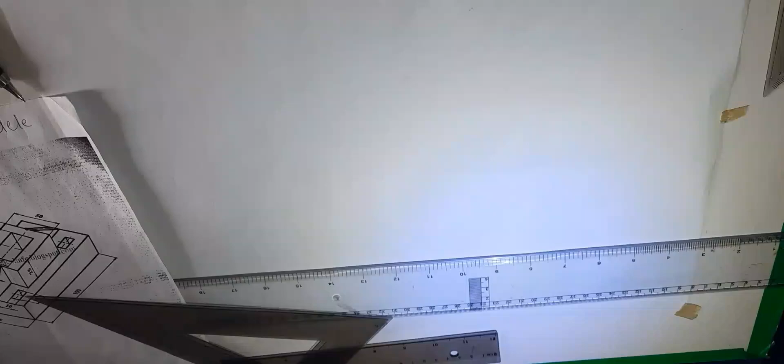Right here, we are going to be making an isometric block. We are going to be doing technical drawing today, and we are going to be replicating this very isometric block on my plain paper. So I'd like you to stay tuned. We will be giving a detailed explanation concerning it. So let's begin immediately with no further delay.

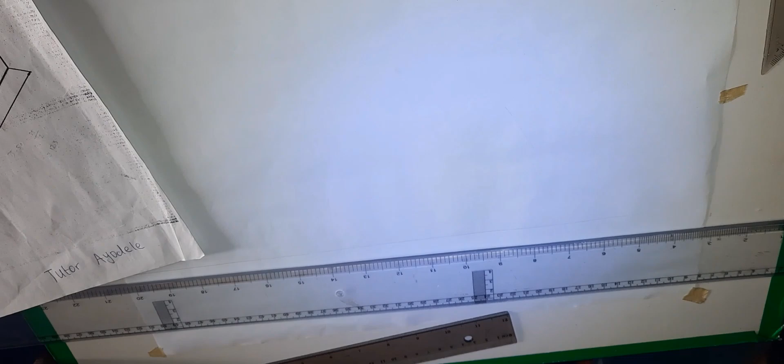Let's begin. We are working with our T-square and our board, so use your T-square, draw a very straight line, let it be faint. I believe you can see the line. Then this is your 30 by 60 degrees set square, and your isometric block is in projections of 30 degrees to the horizontal line that has been drawn. Okay, so this part is the 30 degrees part. Why? If here is the 60 degrees part, if I turn it here, a full triangle is 30, this 60, this 30, and here is 90 degrees.

So let's start. Get a point on the line that you've drawn. Then from that point, project lines to both directions. Take note of that point.

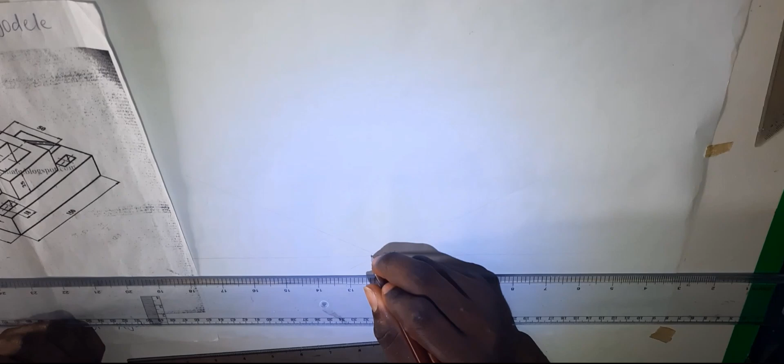Now, like I said, this is your 30 degrees. This here also is 30 degrees. So most of the lines you're using, let them be faint at first, because you're going to use thick lines to show them. So looking at this part, we are going to take here up. I want to start with that place first. So draw a straight line upwards.

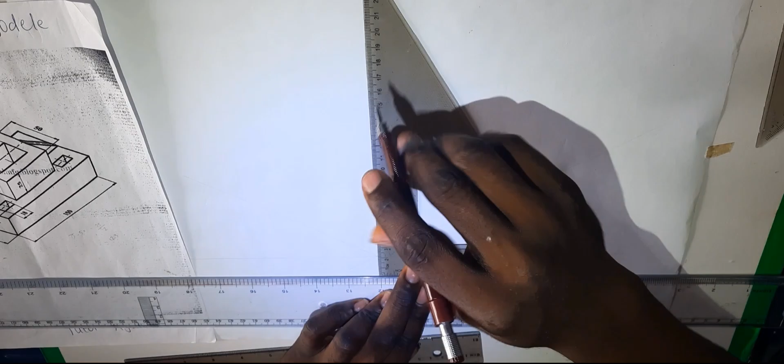Mark 25. So here is the 25 millimeters. This side is equivalent to this side. So I'm measuring 25 millimeters. I'll take my meter rule and get 25 millimeters upward from point 0 to 2.5. This is 25 millimeters, equivalent to 2.5 centimeters. So let's take note of that.

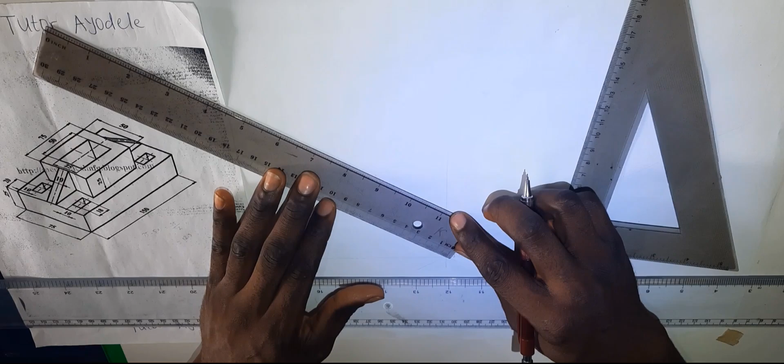So I've done that. Then here is 75 millimeters, which is 7.5 centimeters. I will take the point also. 7.5, equivalent to 75. Take the point. This is the point here. Now I'll take this same line that you've drawn here and transfer it here also upward. You're making reference with your T-square. Take note of that.

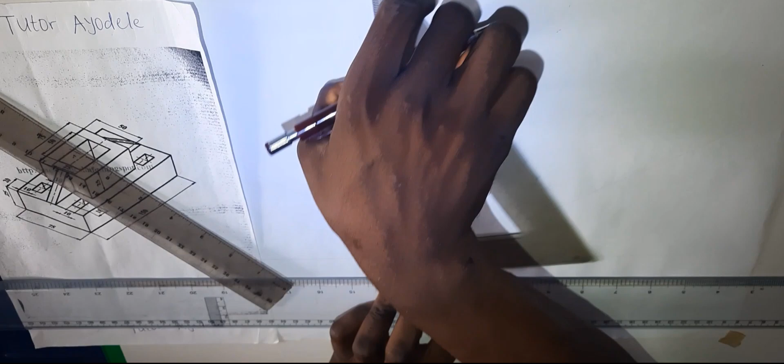Now I can use the measurement on my set square also, because it seems clearer. From 1, I'm going to count 2.5. 2.5 will be at 3.5 for me, because I'm starting from 1. But if I start from 0, it will be at 2.5. So this is 2.5. This is 2.5. What I'll simply do is to connect them directly instead of projecting lines again. So you can see I'm through with this very part.

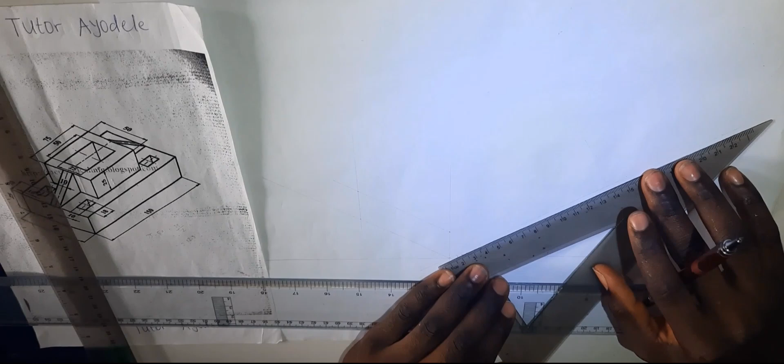I want to focus on this other part now. So this time around I'm taking the 150 measurement on this side. 150 millimeters. Take note, all dimensions are in millimeters. But because I'm using the ruler and the set square, it's centimeters, so just divide by 10. Millimeters divided by 10 will give you centimeters. 150 on my set square. I'm using from 1, so I'll use 160 here. So I've marked the point 160.

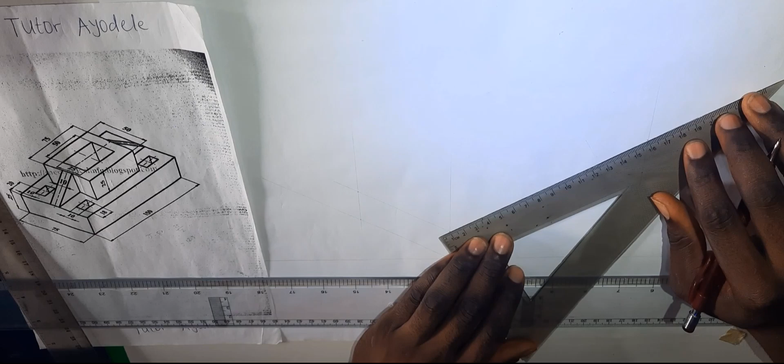Okay. Project line. Using my set square, project a straight line up from that point. So here is the same length as here, and it's 25 millimeters. So I'll still take 2.5 upward. I can use from anywhere. If I'm using from 6, it's going to be at 8.5, because 6 plus 2.5 is 8.5. So we'll simply just connect them. You can see that my measurement is accurate. Let me show you from 1 to 160. Can you see that is 150 millimeters? Very accurate. So I'm through with this part.

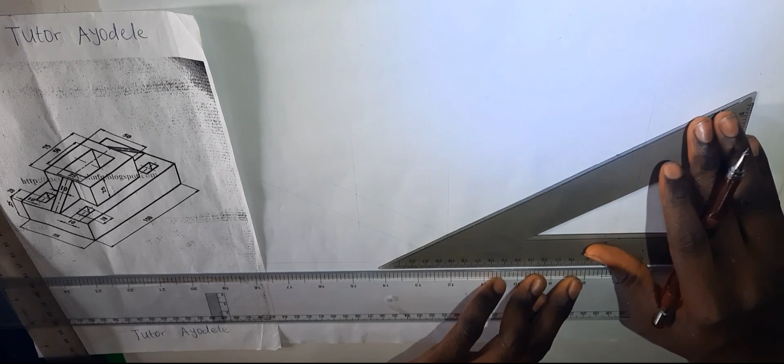Now I want to focus on the top. The top is going to be a bit complex, but I bet you if you are with us, it's not going to be complex at all. So this line that you have here, transfer it using your set square to the other part. Let it rest on your T-square, and then transfer the line upward from that point. And then you measure 150, which I'm using 160.

No, this is the other one. Yes, this is 160. Yes, I've done that. Then if you check here also it will be 7.5, and it's accurate. So draw a line.

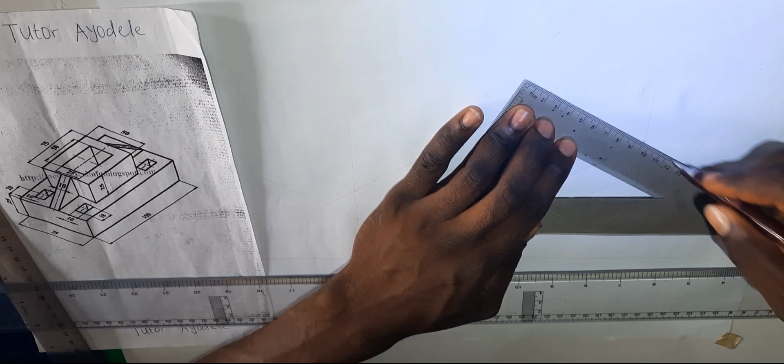So I'm through to the top, but I want to draw all those things that are at the top. It's just like a house built upon a house. So this is a building on top of a building. That's the essence, the knowledge of isometric block. So from here we have it that half of this, because this is 75, so half of it will be what? 75 divided by 2 gives us 37.5.

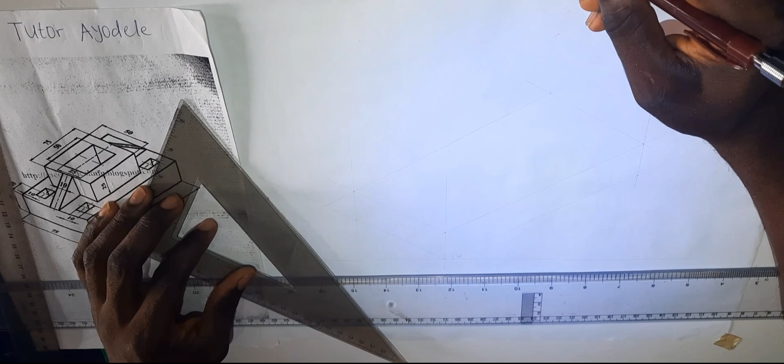Yes. You're 37.5. Alright, so half of this will be 37.5, half here will be 37.5 also. So 37 is 3.7, which is 4.7 for me, but I'm using from 1. 4.7.5, the 5 is in the middle, so this is my 37.5.

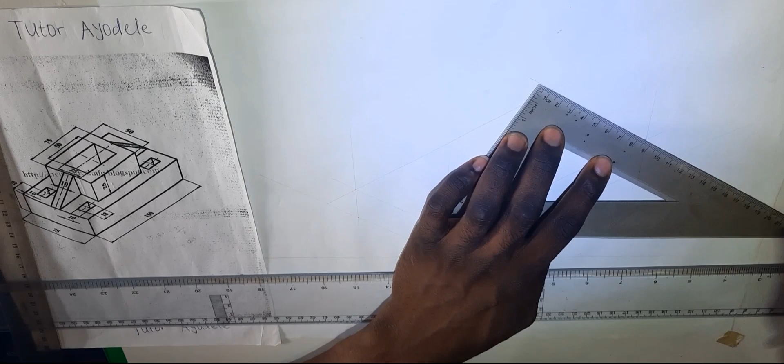Please take note, like I said, we're working with millimeters here, and here is centimeter. Simply divide whatever you have here by 10 and then use it on the meter rule. That's what you are working with. So 37.5, like I said, is 3.7. Then in the middle line also, the one will be 4.7. Then in the middle of 7 and 8, you put your point.

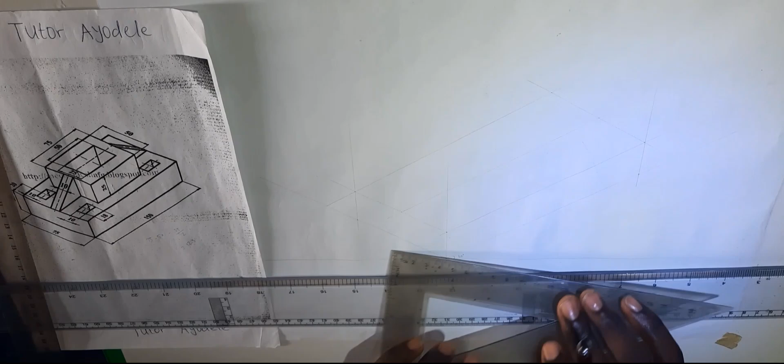That's 37.5. Alright, you can also mark them together, you can join them together, faint lines. All your work should be in faint lines first. Faint lines first. Alright, so I want to construct this very thing that is up here. This very thing, I want to construct it.

Now the distance, I'll get the middle, because this one was done in the middle. So the middle of all this footing is what? 75. So let me get the middle here. The midpoint, 75. That would be what? 85. Because I'm starting from 1.

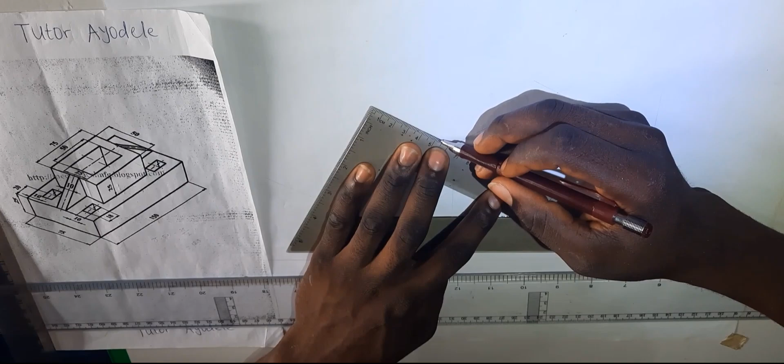The reason I'm not making use of my meter rule that much is because it is somehow faint. This 85. Okay, join them together. So this is the exact midpoint of this very shape that we're working with. So I want to construct this now. I'm going to construct this full shape.

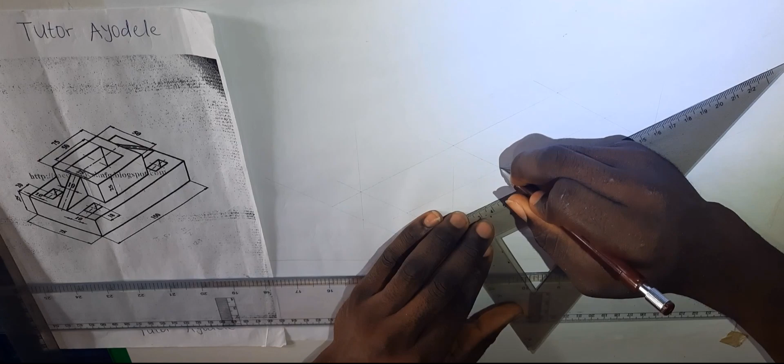Here to here is what? 50. So here to here is 50. So the base also will be what? 50. But the footing is 75. So from this middle, let's get the middle. 50 will be here, 50 will be here, then 75. Let's get 75 first. 75.

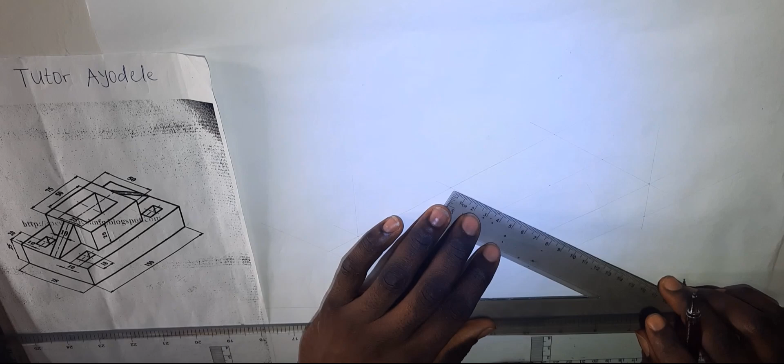It's 85 for me. Right here is 50. That's 25, 25. 25, 25, using 25, 25 here, and what? 25 here. That's good. You can also mark it here. 25 here, 25 here also. You can do the same here. That's the reason why I'm doing that.

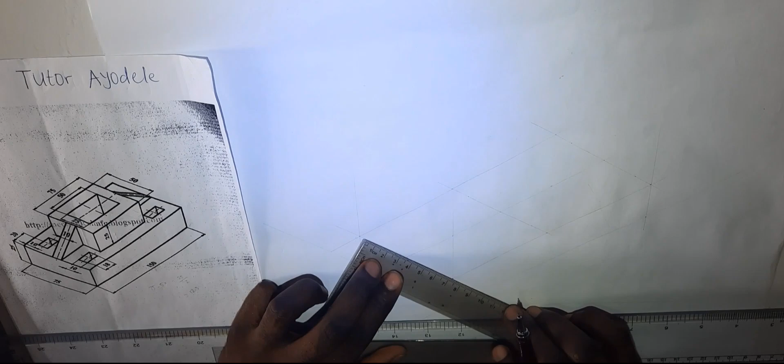All your points, all your lines should be what? Faint at first. You join the lines together. See that my lines are very accurate. Alright, I want to transfer this line. Instead of marking points again, let me just transfer this line.

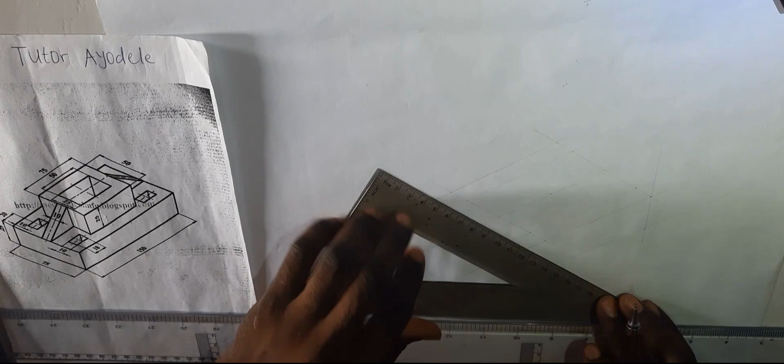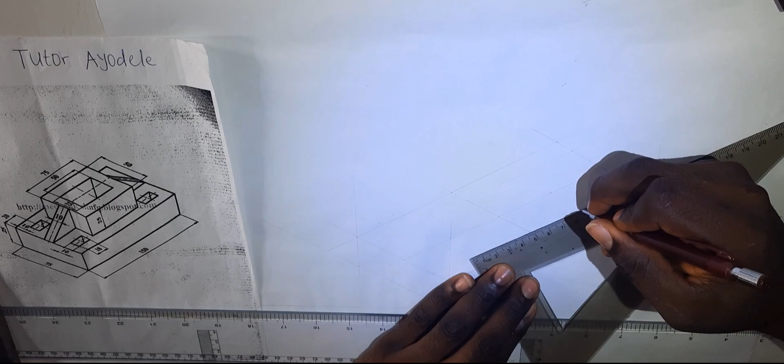Okay, for accuracy, let's mark the point. 37.5, 37.5. Also here. That's 37.5. Mark as many points as you can for accuracy, please. As many points as you can for accuracy. 7.5.

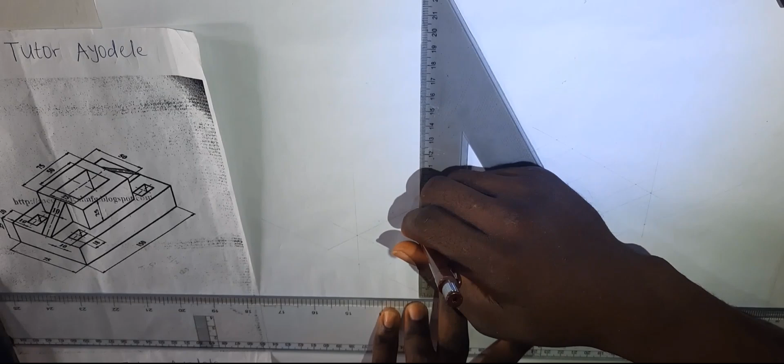Alright, so I'm done with that. I'll simply connect the lines together. So this full part is half of 75, which is 37.5 here also. So now let's go ahead to construct that shape on top. From those points you marked from here, project lines upwards. Like this. Project this upward too. Then project this upward also. Yeah, so I'm through with that.

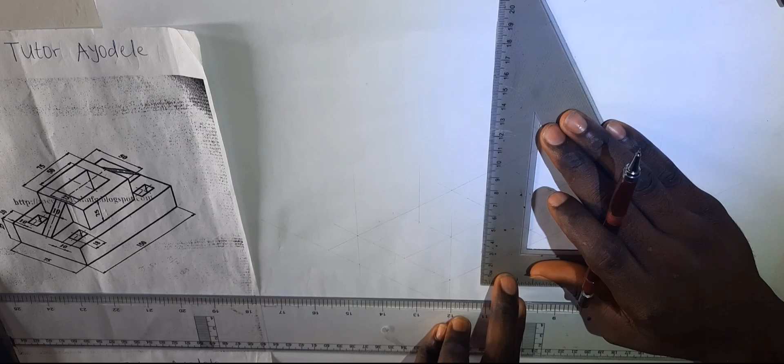Now you see the height of this upper box is 25. The height is 25. Let's mark out 25. From 3 is going to be 5.5 here. It's going to be here from 3. So here, from 4 is going to be 6.5. Do not be confused though. I believe you should know simple mathematics. So from 4 also, we're having 6.5, that to represent 2.5. Yeah, so that is it.

Now let's mark out those points. Let's join them. Join the points together. We have this. This one is already joined together.

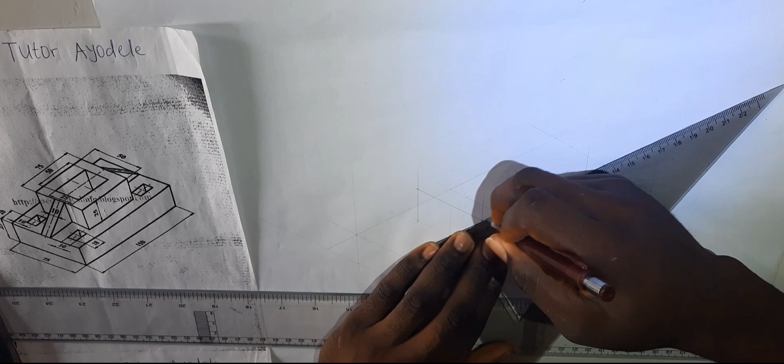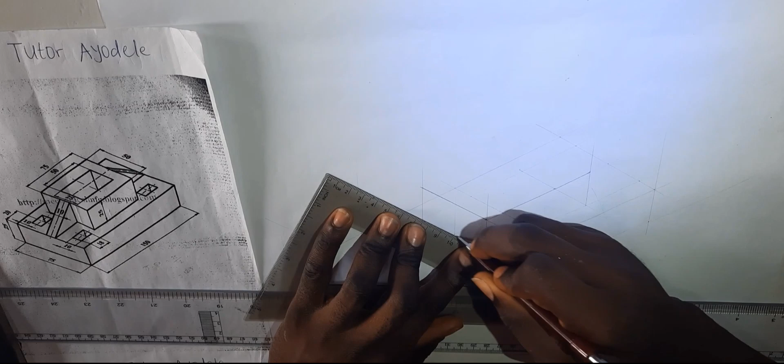Let me make it a little bit thicker so we'll not be confused. Now I can thicken that place, the upper one, so that we will not be confused. We'll know what you're doing. But the advice for not thickening our lines at first is so that you will know what you are doing, so that you will not dirty your work also. But I want to thicken it so that we'll get a clear picture of what I'm saying and not be confused because of the too many faint lines that are there in my work.

So I believe you can see the shape coming out now already. The upper box. It's like a cuboid actually, not a box. It's a cuboid, not a cube. Now as you may know, this place is there, like it's for this side. So when I reach, I'm going to clean this place to indicate this shape that is there. But for now, let's concentrate on the upper. So I've successfully drawn this.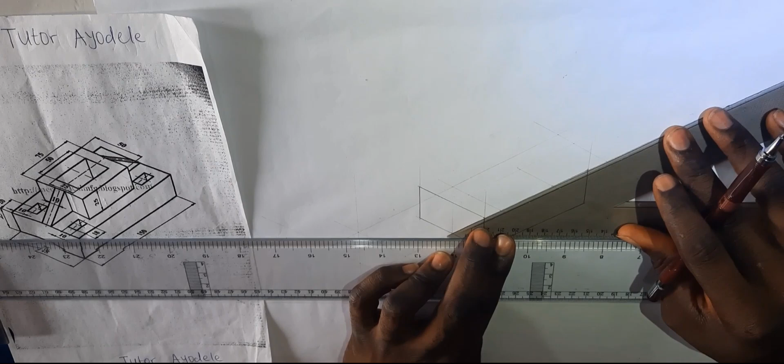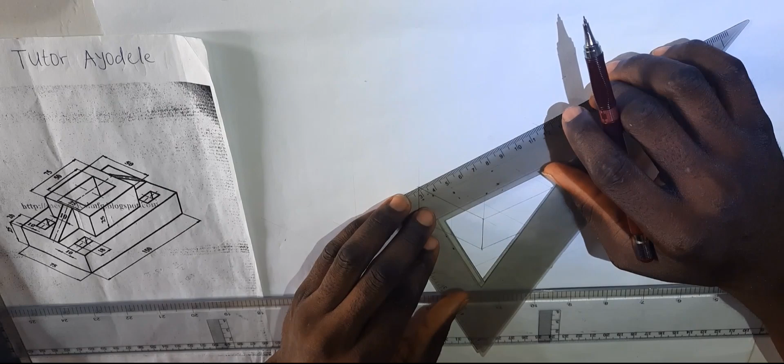I want to just transfer this line now to the other side. So if you do that, like this. All right, so I'll mark out 75 on that. 75 from 3 to 75 is going to be 10.5 centimeter. That represents 7.5. Then here also is 50, 3 to 8. You can see that they are accurate. 50. I got the 50. Let me also bold it so that you understand what I'm doing and not be confused.

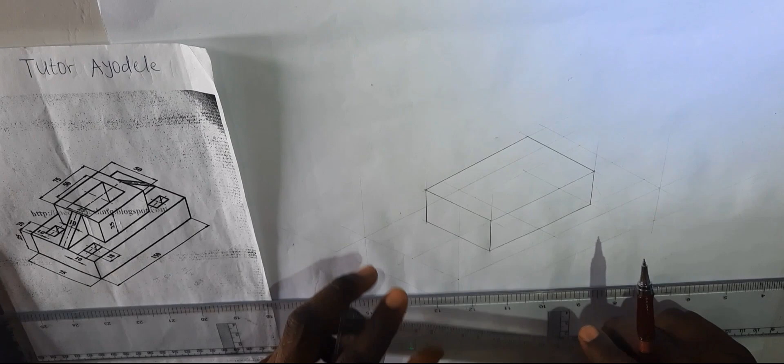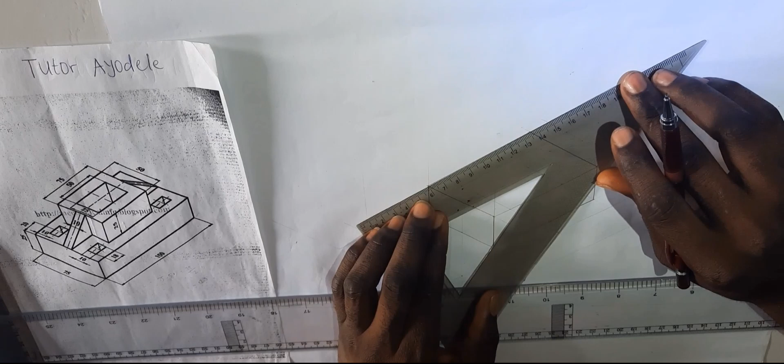All right, so I want to get the middle. Now here is 50, so let's get the midpoint. Half of 50 is what? 25. That is from 7 we have 9.5. Mark there. From 8 we have 10.5. I think we already have a middle. This is the line already, so no need to draw that line. From 6 to 13 we have to get 37.5. If you add 37.5 to 60, it will be 97.5. So mark that point there. From 60 again, you have 97.5. Mark that point there. Then just join them together. Now this is the midpoint of what you're working on.

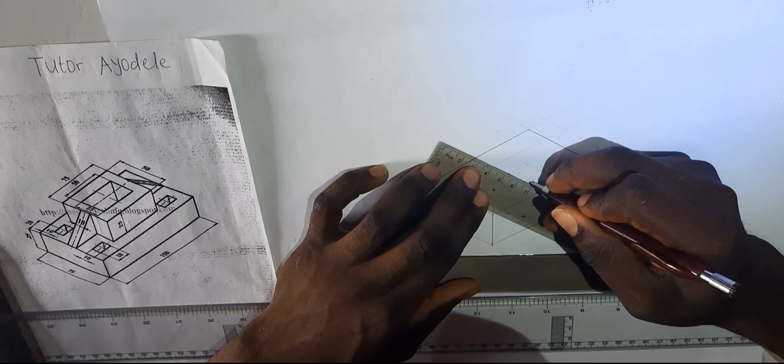Now this whole thing is 25. So 25 divided by 2 is 12.5. Let's work with it. From here is exactly 12.5, and this will give me 25. This is full 25. Now we've gotten that place accurately. The other side is 50. Let's see if this is accurate also. From here to here is 25. From here to here is 25. That is 50. To get the one here also, from here we're trying to get 25. From here is 12.5, here is 25, another 12.5 again.

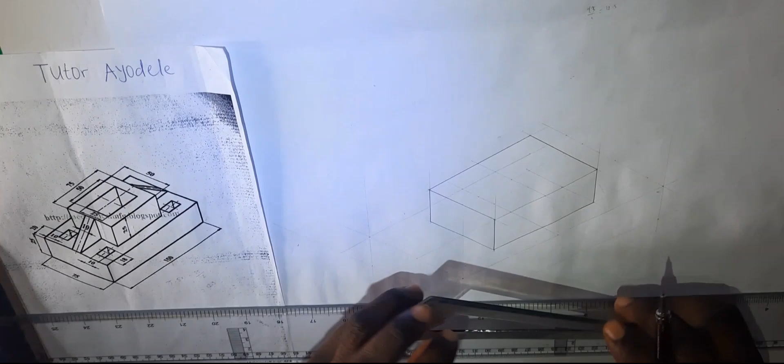All right, so we're almost through. Kindly, you see these two points, kindly join them together. Then from here you have another 50 again. So you have another 50. This is 25. This is 25, 50. And this should also be 25. Accurate.

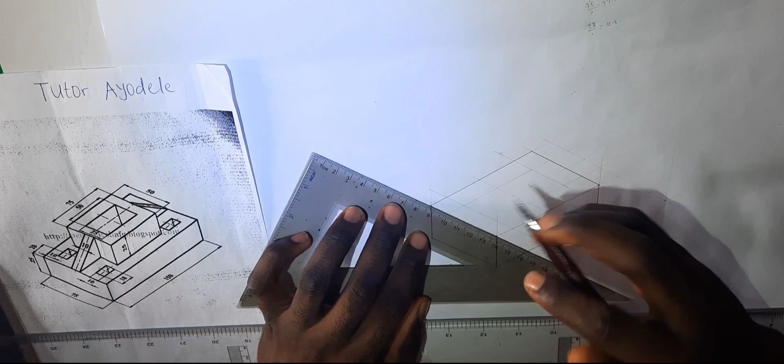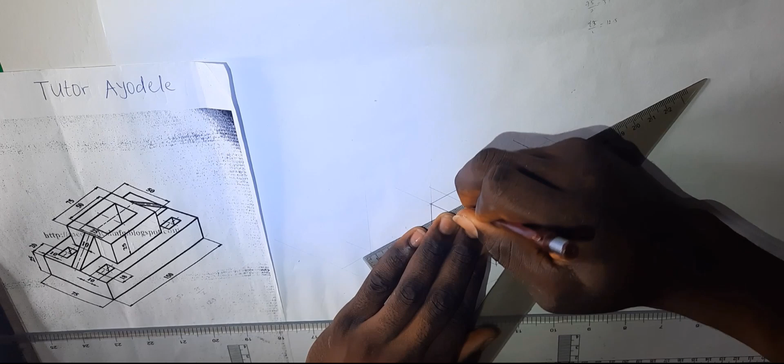All right, men and brethren, we're almost through. There's still some things to do, but I like to try as much as possible to be fast enough to your own understanding, and I believe you have been following. Now I'm going to bold it, thickening it, to see the true shape of the upper block, the cuboid at the top. All right, successfully done that.

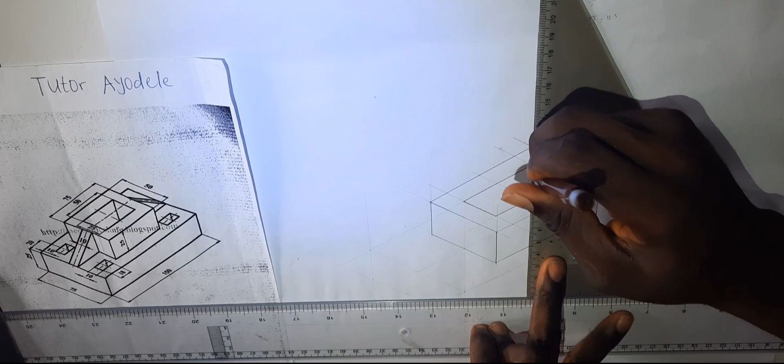Now look at this hole. In the hole there's one line going down, indicating that there's an opening there, so we are going to put that line there, just a straight line. Place your set square on your T square. This is called the set square, this is called the T square. Place it there and draw a line from the edge. Make it faint first from the edge. That is it. So we are almost through with the top.

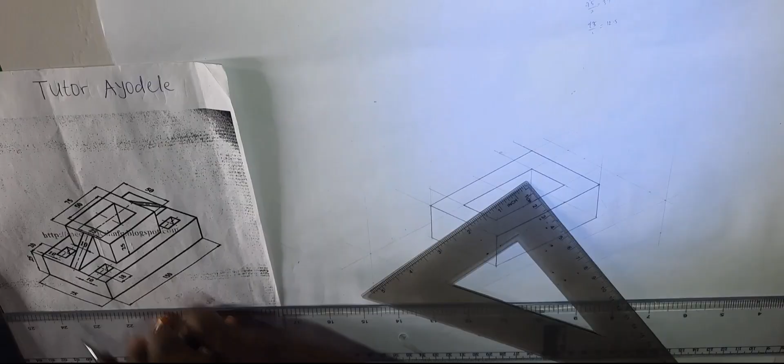Almost through with the top. So I want to try and construct this well, 1 2 3 4 5 things to construct. So let's do that. Now from here to here, the midpoint of this box to this outer line here is 20. So let's mark out 20 here. From 5 to 7, that's 2 centimeters, which is 20 millimeters. I've told you before, divide millimeters by 10, you have what? Centimeters. Okay, you should know your mathematics.

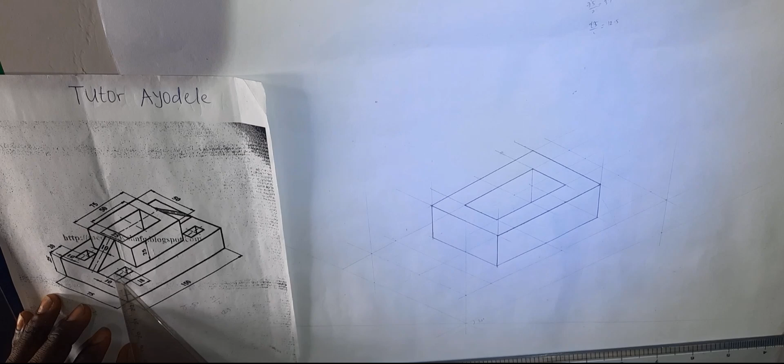All right, just simply join them together. Yes, you can just join them together. Make it faint, join them together, no problem. So you have that already. Now the distance from here, this part to the edge of the rectangle there, is what? 10. Yeah, 10. And also it's also 10. So from here to here is what? 20. It's going to be 20 also.

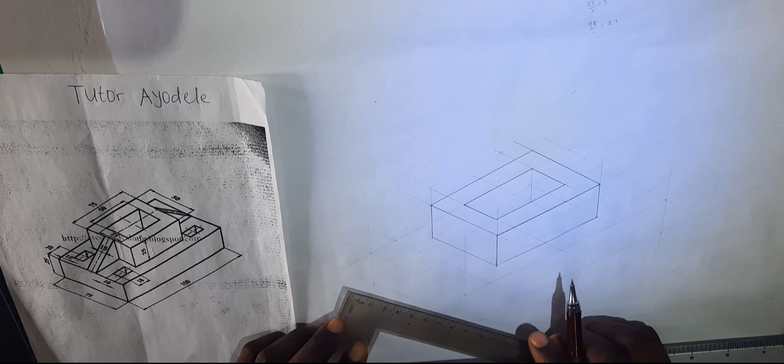So 2 to 4 is what? 20. 2 to 4 is what? 20 again. Let's mark out 10 also. Let's mark out 10. Now, simply join those 2 points together.

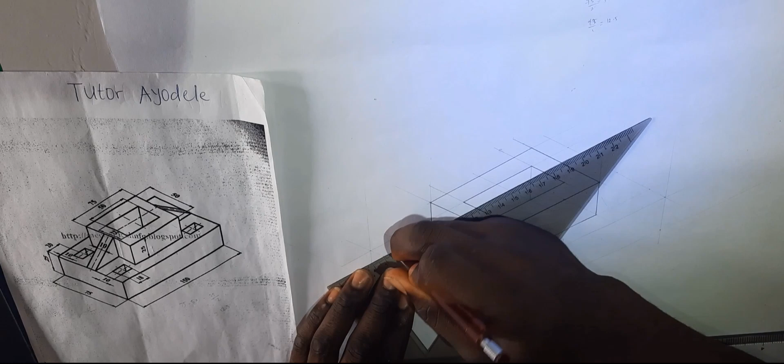Now, take note that the rectangular part of this is 18. So this is the middle of the square. So let's take 9 here and 9 here and join. We have 9 here, 9. What I'm measuring is 9 millimeters, which is 0.9 centimeters. 9 here also. The same thing for this part, 9 and 9 here. So join the points together.

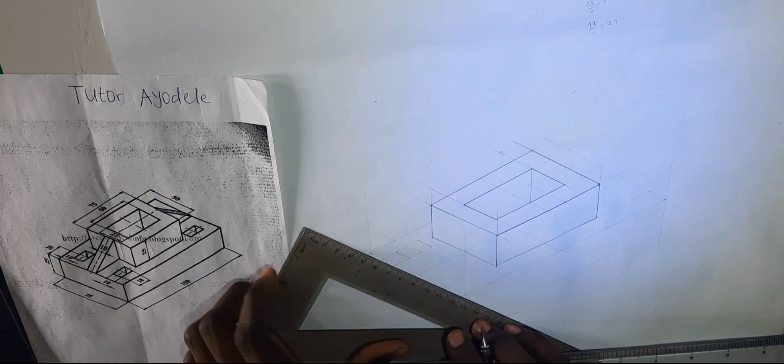Join them together. Let me shine it so that you have your shape. You have your rectangle opening there. It's like an opening. That's why you see your center line there. I'm also going to indicate that center line. But the size of this is 18 by 10. Look at it. 18 by what? 10. Here also, let's do likewise. Let's do justice to this place also.

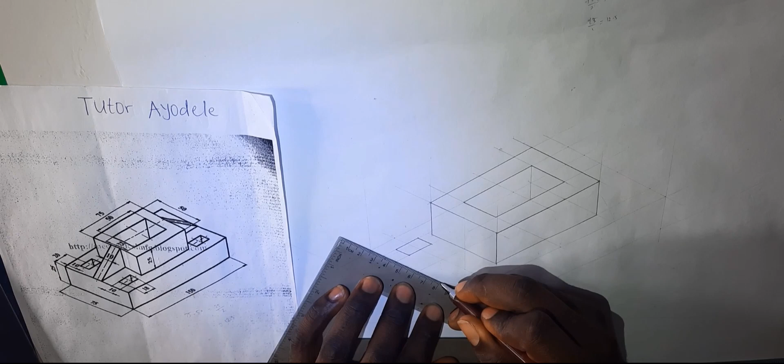That is 20. Sorry. From here, this is 20, and this is what? 10. The same thing with this place. I have here to be 20, and here is what? 10. Simply join the lines together.

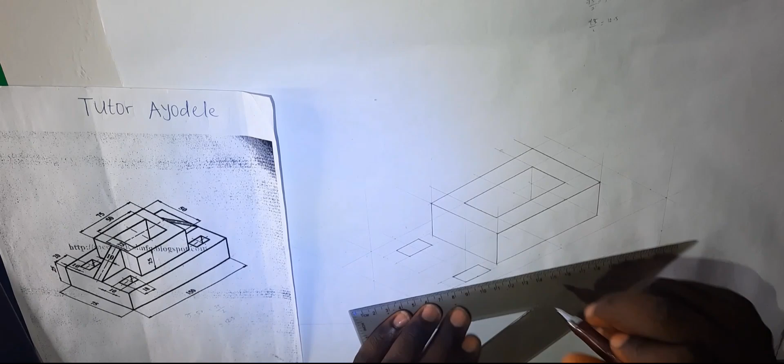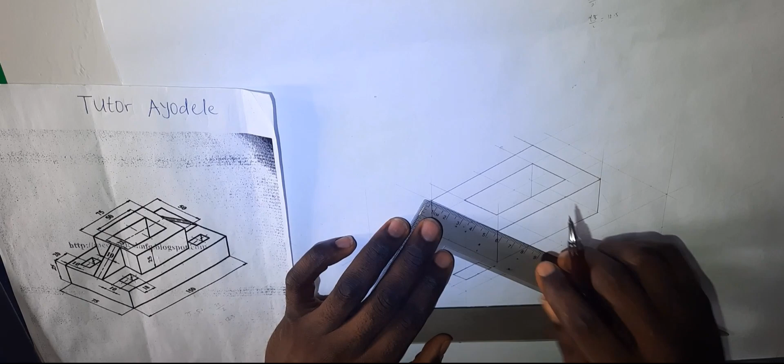All right, so let's continue. I've done that. Now I want to get this part, the midpoint. We've done the midpoint already. We've established that. Now the size of that is 10. So mark out 10 millimeters, I'm taking half here, that is 5. Okay, the same thing here, 5, 5 here also, taking it there like that. So I'm going to clean this whole part because of what I want to draw. I told you before.

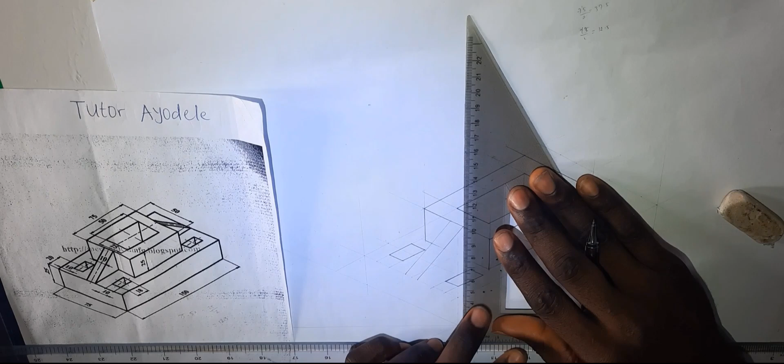All right, now connect this line to this line, and connect this also to this. As you can see, we've done that successfully. Now the next thing to do is to draw a straight line from this point. I just join it downwards from this edge here, to meet this side. Yeah, and you are through with that. You also connect from this part to this one also. All right, almost through with this work. After that, we are going to make sure we border everything.

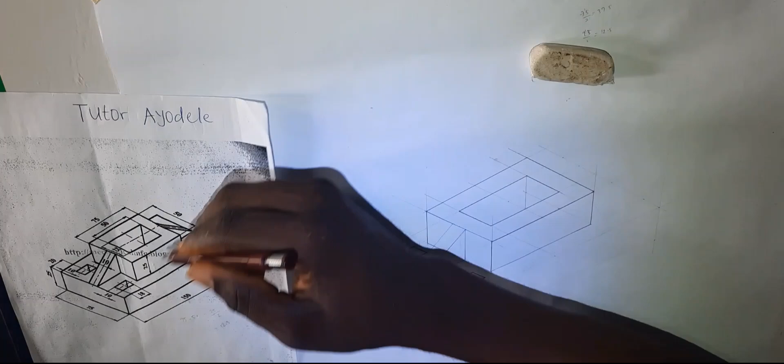Now we are doing the other part. As you can see, this part shows, this one shows, and there's also this box here. I don't know if it's going to show, but we'll try to construct it to see. I'm not sure. So let's do that. We're going to have 10 also. This is the midpoint. So we're having 5 here, 5 here also. Then the same thing goes for this place. 5, 5.

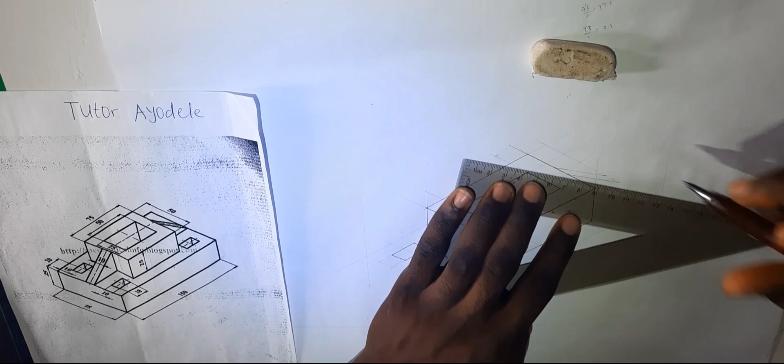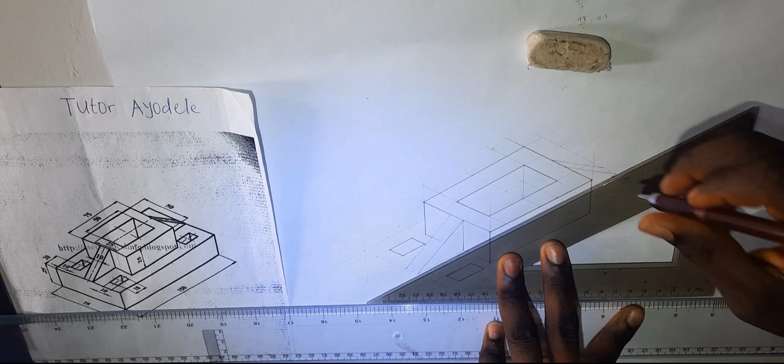Okay, connect this line with your set square, slant line, like this. Please use straight set squares, don't mind my own. Now we are going to construct this one. Remember that this distance is 10. And from here to here is 20. So mark out 20 there and join. Just join with the other one that you have.

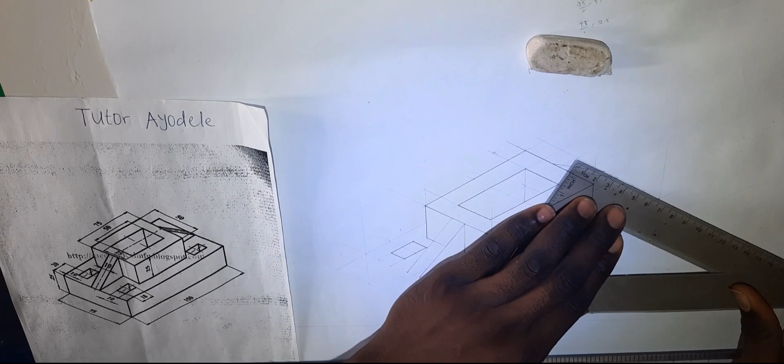All right, so now we are going to get this full thing. You have 20 there. The middle is 10. Then also remember, from here to the middle of that opening is 20.

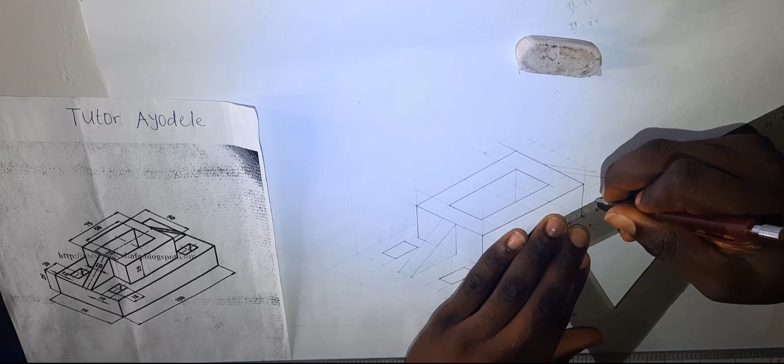Simply mark out the 20. All right. So we have it as such, right? Now the full length of this is 18. So here that we mark is 10, not here. Here is not 10, but here. So let's join them together. I used here initially to draw this place, so let's join them with here. They correspond to each other.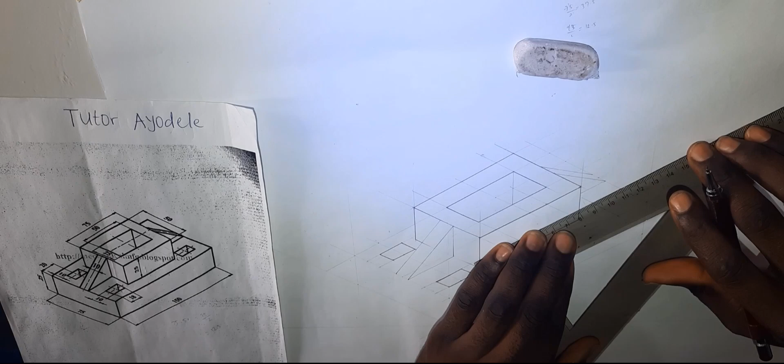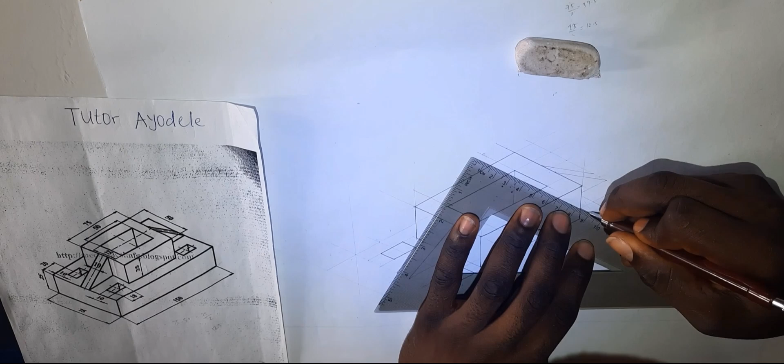All right, so this is my midpoint of this box, this opening. So take 9 here. I'll take 9 here, that is 0.9 here also. And then from here the same thing, 0.9 also. Yeah, then join. Join them together.

Okay, men and brethren, I bring good news to you. We are through with this. What I will do is to begin to shine on these things, like bolding it. Make it bold. Make it look clearer. Bring out the real work you are doing. Now, if you look at the boxes, they have lines showing you that this is an opening and that you should have a center line for it, like I did for this. So ensure you put that line in all of them. Make it faint.

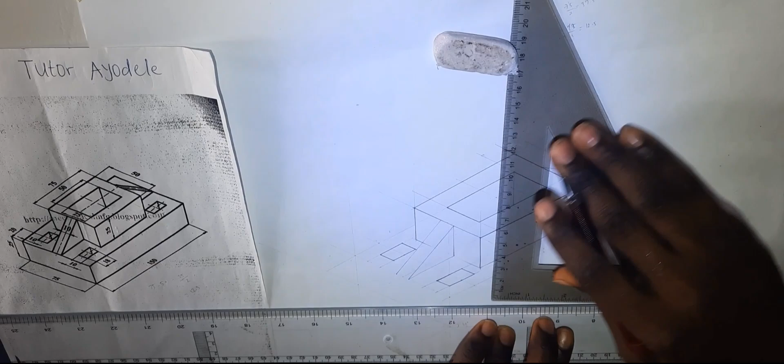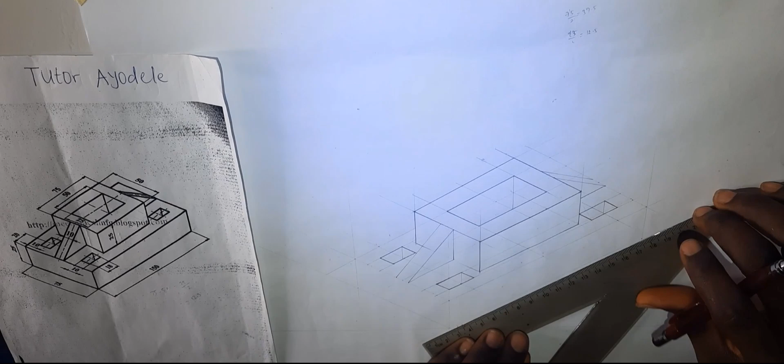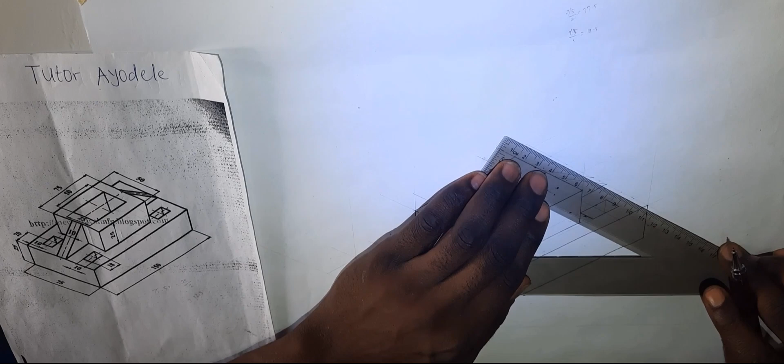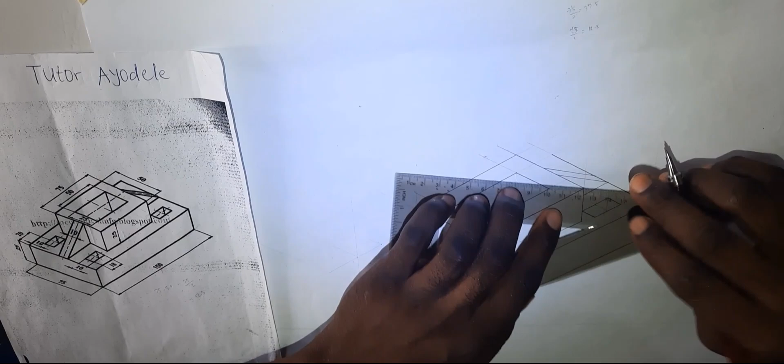Alright, so let's give our work its true nature. Let's make it sharp. Let's bolden everything. You have here, draw your line, make it bold. You can work with a handkerchief so that you can always dust your work when you're through with a particular place. Don't use it to rub your work. Just dust the paper with it, so that the pencil scrapings don't rest on the paper and cause your work to be dirty. So just make it bold. Bring out the true work you are looking for. Bring them out. Here also.

Alright, you can now see how it's giving it meaning, right? Before we bolded it, you were seeing a different kind of thing, as if, does this even make sense? But now it does, right? That's the beauty of isometric and technical drawing, actually. So bold your work, make it clearer, bring out the true shape you are looking at. It's the true shape that you're working with.

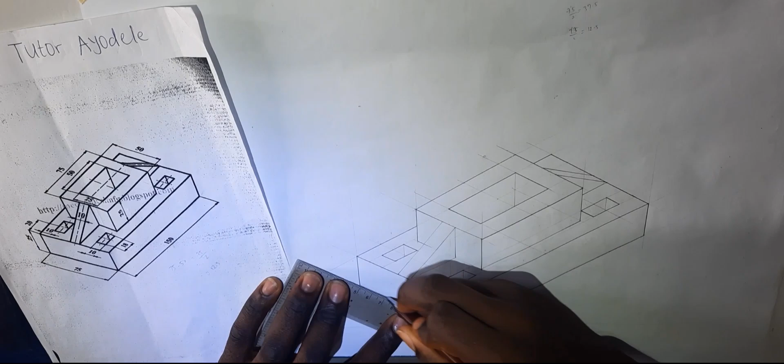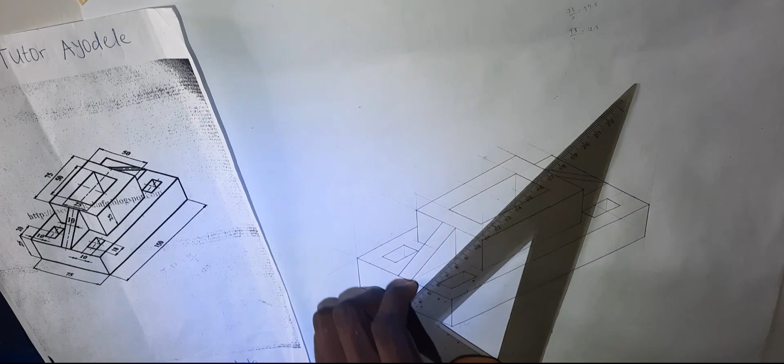Remember, here is still 30 degrees. Nothing much to indicate it, but just for basic knowledge. And I told you that this part is the 30 degrees, the 60 degrees. So don't forget, it's a 30 by 60 degrees set square. The other set square in your mathematical set is called the 45 by 45 degrees set square. So I believe you know the difference now.

Alright, thank you. Never mind. Don't worry about sending me money for what I've said. That's our work, to educate you very well, to know everything about technical drawing.

Alright, I'm basically through. I'll just dimension my work so that you can see it. Now this part I cleaned, I'll show it. Alright, so let's give it dimensioning. Let's dimension it now based on how they did it. Always dimension based on how you were given. This one was projected this way. Alright, so we are through with the dimensioning.